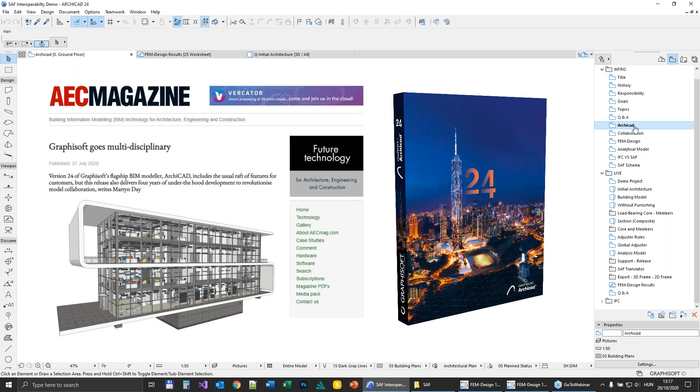For the design phase, when there is a lot of iteration work between the disciplines, Archicad 24 and BIM Cloud offer a common workplace for real-time collaboration among project team members. Architects, structural engineers, and MEP engineers can work together on one common model in real time, with protection for the different roles and responsibilities. When they set the construction elements and their function together, Archicad creates the analysis member representation

of the load-bearing elements under the control of the structural engineer team member. This analysis model becomes the parametric input for an analysis software to create its own native model without data losses or any conversion. As a side note, for the detailing phase, Graphisoft still promotes the so-called reference model concept in the name of the Open BIM approach. That means Archicad can federate IFC models stored on BIM Cloud within the project.

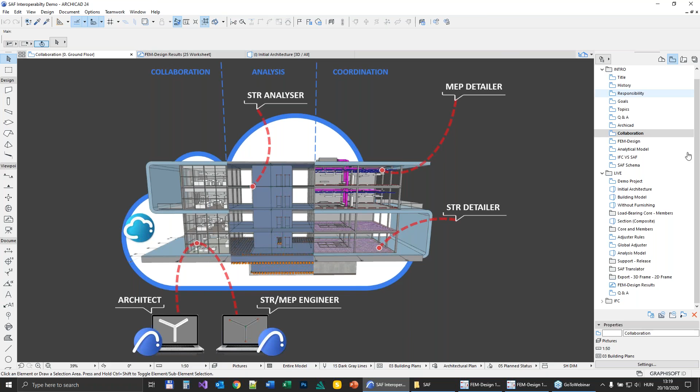If we go back to the analysis model part, there comes the opportunity to connect to Graphisoft's new ecosystem with FEM-Design as a structural model analyzer, as a steel, reinforced concrete, or timber designer. As mentioned before, the analysis model is the common language between the structural BIM modeler, Archicad, and the analysis software, FEM-Design.

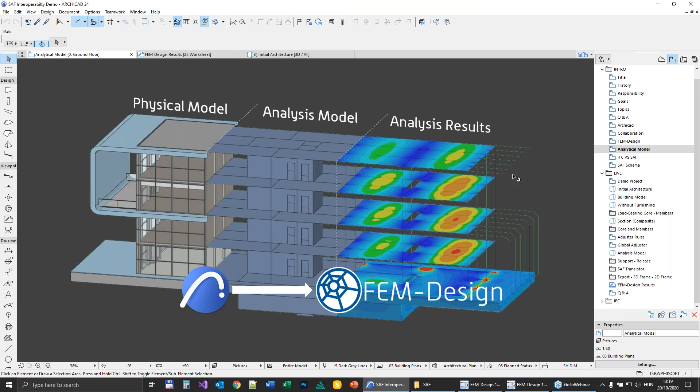There are 2 open source file formats that can be used for analysis model sharing: the so-called IFC special model view set, which we call structural analysis view, and an Excel-based new format called SAF, structural analysis format. Both are optimized for storing analysis model components, such as beam, column, wall, slab members, structural supports and connections, structural profiles, and materials.

But there are 2 major differences. Thanks to SAF's Excel format, engineers who especially love Excel immediately and easily understand the file content, easily check its correctness, and easily edit it within Excel if necessary. They can also create macros or functions to manipulate or use Excel data for other reasons, for custom calculations.

You may also read an IFC file, for example, in a text editor, but you should understand the hierarchy and the relation between the members, the file rows. You are not able to see the same type of items like materials, profiles, supports, nodes, and so on, listed together on one page. As opposed to that, in SAF, you can see the different item types in different worksheets.

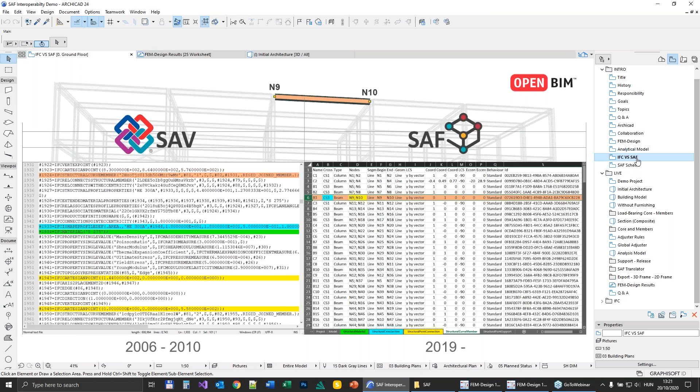As I said, the SAF schema is open. Its description is available on the following public site, you can find it here. And you can easily understand the meaning of the column headers or items of this file because you can see description, examples, and so on.

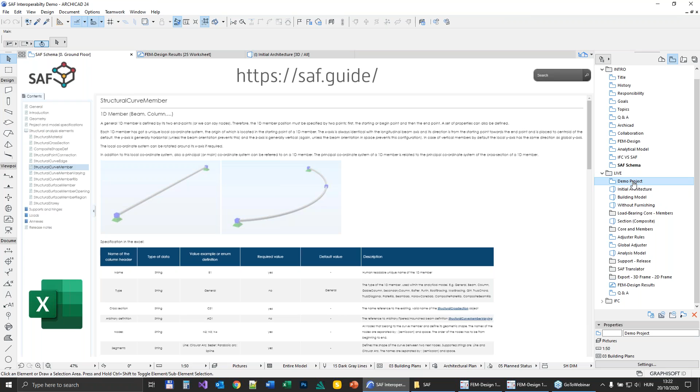Now let's start the live demo about the collaboration workflow between Archicad and FEM-Design. I will use a Graphisoft project for the demo. Let's see it live.

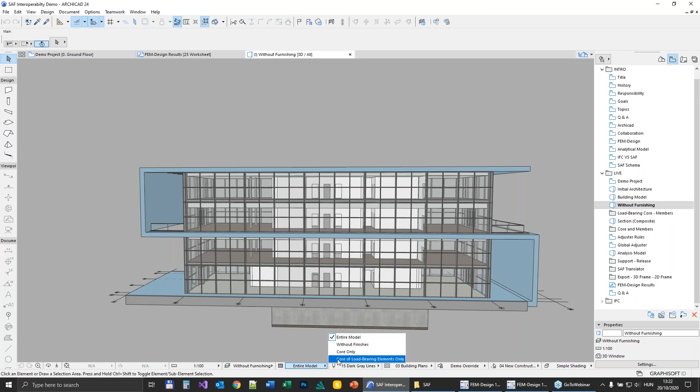Here you see the initial architecture. Thanks to the layer system or element classification, you can easily filter for the building model, and maybe show the building model or only the construction elements without furnishing. If you have classification for the load-bearing elements, you can easily filter for them with one click, using the partial structure display. We call it core of load-bearing elements only.

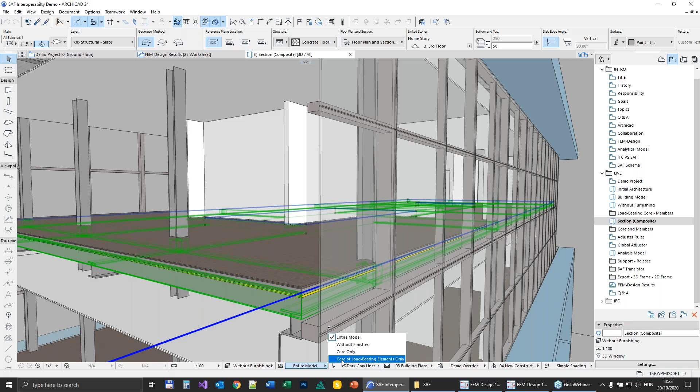I show you a section view of this model. Here you see that, for example, the slab has a composite structure. If I check the skins of the composite structure, there is one core skin of this composite called reinforced concrete structural. Here you see the core. If I show now with the partial structure display the core of load-bearing elements only, you can see only this core part. This is important for the analysis.

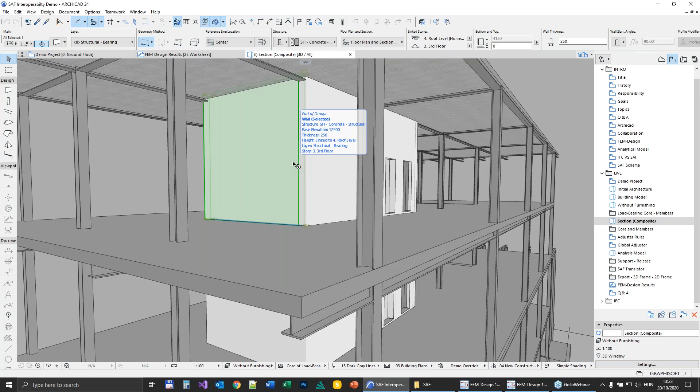In Archicad, the software creates the analytical model inside the core parts. It's the same for the walls because it's also a composite element. You can easily check its material. And if now with one click I show you the analysis model, you can see that the members are generated only in the core, by default in the center of gravity of the elements.

I can hide the physical body so you can see much better the analysis members. You can see here 2D members for slabs, walls, roof elements, and 1D members for columns, beams, trusses, and so on.

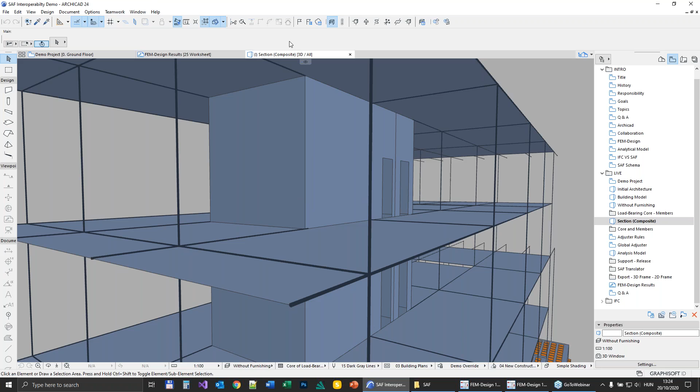Let's see how Archicad generates the analytical model. Here you see an example: there is a column and a beam connected to each other, and by default these elements are not adjusted. As mentioned before, the default position of the analytical members is in the center of gravity of the elements. The user can define rules, or Graphisoft also suggests adjustment tools in the package by default.

You can define how these elements should be connected. What is very important, and it's a must, is that the analytical model must be continuous, because one element transfers the load to another. It's important input for the analysis application that the finite element calculation should be run on a continuous model.

Here you see an example that the user creates an offset for the beam. This is the first rule. Then just stretch the column to the beam, and it's cut back the beam to the common intersection of the two elements.

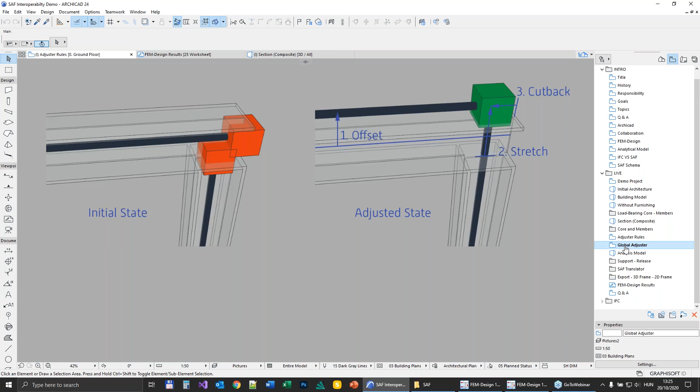You may ask why we need this offset. Because it's very important to consider the neighboring elements. Here you see a neighboring connection with major elements connected to each other. That is why we need to offset this beam element and then continue with the stretch, the cutback function.

So the user can create global and local rules, and based on this, they can fulfill the continuity requirement. I just show you the dialog. Here you can define the adjusters. For example, here are the global rules, which are valid for a tool, for example for a slab tool — so there is an offset adjustment for elements created by the slab tool. Or you can define local rules defined by criteria. For example, they can use classification to define different local adjustments, such as adjusting the footing classified elements to the slab elements. You can also set rules for how the software handles openings and so on.

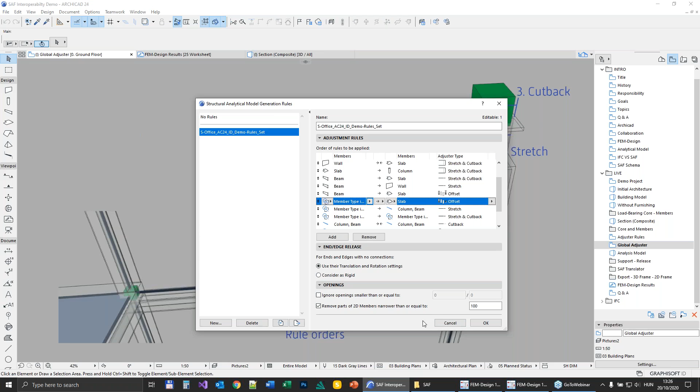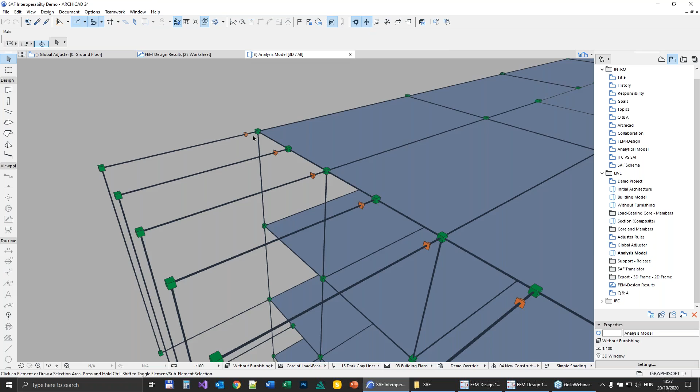Finally, here you see the analysis model I showed you before. As you saw, in Archicad you can also create supports to support the whole structure — here is a special command for this, the structural support tool. You can also define the end releases of the members. Here you see bar elements, and if I turn on the visualization of end releases, you see that for beams, one end has a fixed connection and another end has a so-called hinged connection, so all rotation components are allowed.

If we are ready with the analysis model, we can export this model to an analysis software. For this, you need to do so-called profile and material mapping. You should define this mapping optimized for the receiver application. Some analysis applications have their own mapping system, but I think it's much better to do it in a modeler.

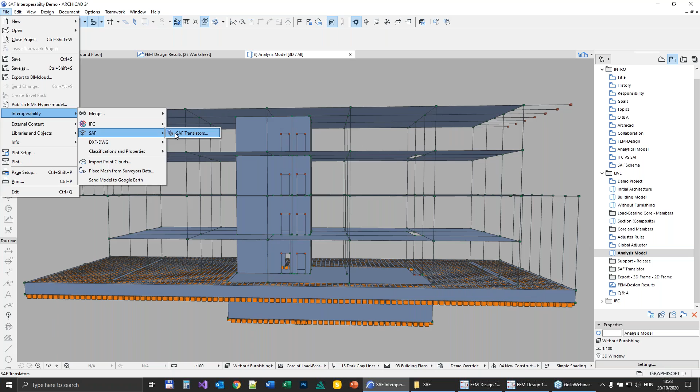For that purpose, Graphisoft implements so-called SAF translators, and here you can set settings for import and export. Here you see, for example, the material mapping. As you see, by default it's empty, or it can be defined by the default Archicad template. But now I would like to focus on this project and add some materials.

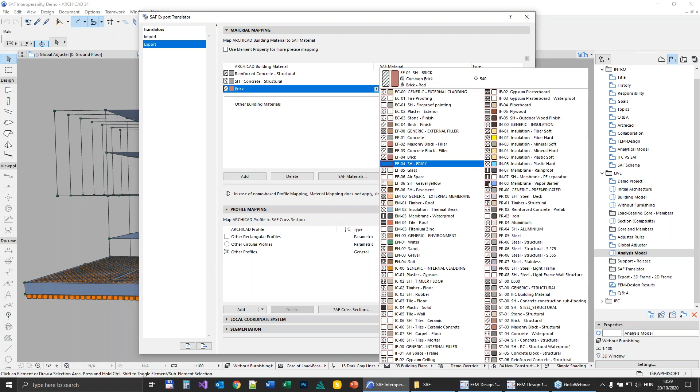For example, there was the slab part. It was reinforced concrete structural. There was another material for the walls, this concrete material. Also, there were steel elements, with this steel structural material and so on. Here you see that the list for the mapping is empty, or there is only one object.

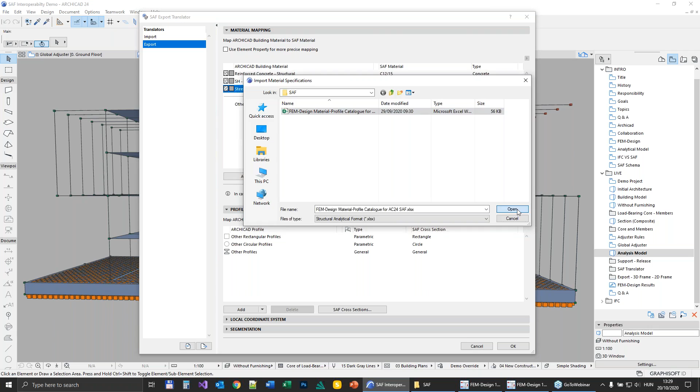Here you need the FEM-Design named materials. How can you get these materials? There is a so-called SAF material importer where you can import, for example, all materials defined by default in FEM-Design, or defined by a FEM-Design user. Just click open, and as you see, all concrete, steel, and timber materials are now available in FEM-Design naming.

So then, if I go to reinforced concrete, I can choose to set it for a FEM-Design material with this concrete quality. Then I choose another material for the other Archicad material. Of course, in Archicad, you can also create well-defined concrete and steel qualities, but in this project, the architect together with the structural engineer just defined general materials. And for steel, instead of concrete, I can choose this steel quality.

There is a so-called Jolly Joker material. That means that all other materials which are assigned to the analysis model but not mapped here will be mapped with the Jolly Joker material. For example, I use a very weak concrete for it because we need investigation of these materials.

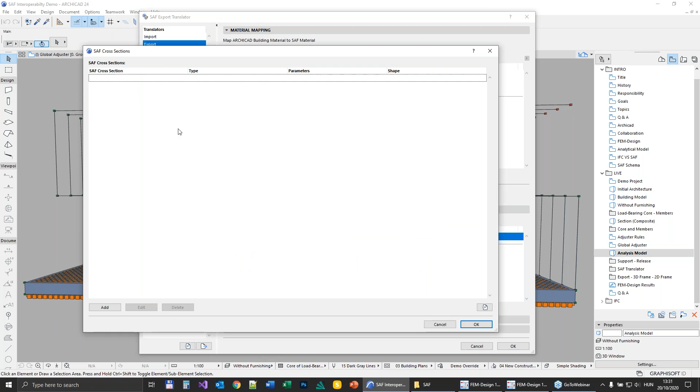Let's go to the profiles. With one click, I can import all profiles used in the project for the load-bearing elements. In this project, only one steel profile was used, and now I would like to map it. For that reason, I can import it first. Here you see that the SAF cross-section list is empty. So now I import all profiles available in FEM-Design, or in a FEM-Design project, from the catalog. And here you see thousands of profiles available now.

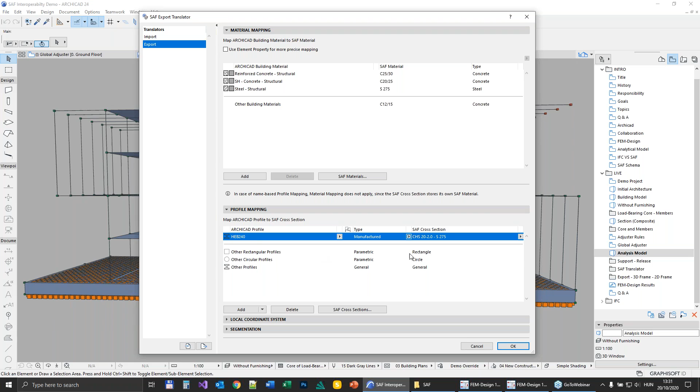Then I can go back, and here you see that I would like to use name mapping. That means that this steel profile should be mapped with the FEM-Design available profile. Then I search for this element, and here you see the same name, but in a different written formula. Okay, I'm ready with the material and profile mapping.

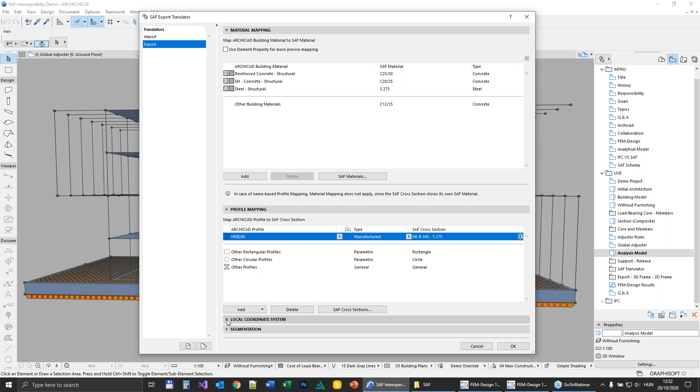There are some other mappings for the export. For example, by default, Archicad uses a special local coordinate system for positioning the cross-sections for 1D members, so for columns and beams. FEM-Design uses a so-called general local coordinate system. So here you should set the local coordinate system used by the receiver application. Now we use FEM-Design, so we use this setting.

And the last setting at the export is about the curved walls. You know that major structural analysis applications don't support curved walls. They use polygonal, so-called straight segments for the curved parts. It's true for FEM-Design also. So now I use the so-called segmentation settings, and then I am ready for the export.

If I collaborate with FEM-Design on further projects, then I can save this as a translator, and I can use it, or I can add it to an Archicad template and use these settings for all projects. Of course, you can define more detailed material mapping. Now I mapped only the used materials and cross-sections.

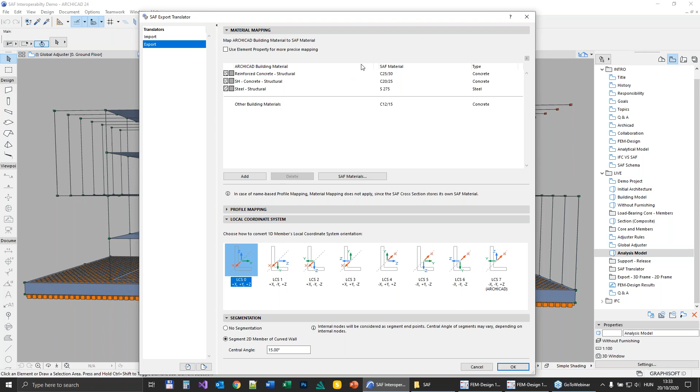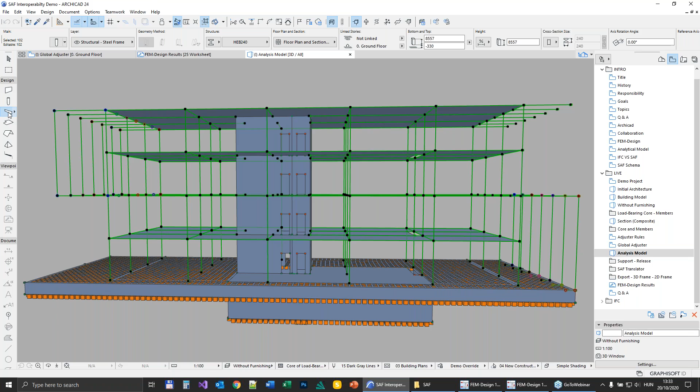Okay. Then when I'm ready, now I can start the export. I can export the whole analytical model, the entire analytical model, or I can export only some parts of it. So for example, only columns, or only beams, and nothing else. So here you see the frame structure. Or I can select one frame standing, and I can export it.

So if I go to export settings, so save as, here you see that there are three options. Selected elements means the elements I select in the model view, or the current model view. If I choose visible elements, I export all elements visible in the current view. If I choose entire project, I export the entire analytical model. Now I would like to export the entire analytical model, and I give it a name, for example, Archicad analytical model. Then save it.

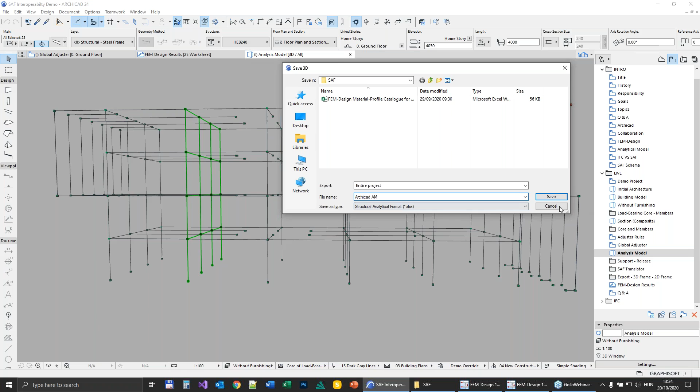As you see, it's very fast. Then I can check, it's not a must, but I can check the analytical model file, the Excel file here in Excel, or in Windows you can use this preview mode.

Here you see that there are different sheets in the Excel file. There is one page for the project info, another one for the model info, and here you see the local system we use and set for the export.

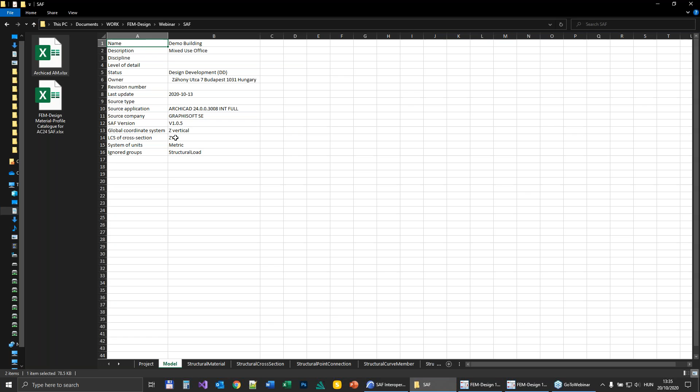Here you see the materials. As you remember, we map the three materials, one steel and two concrete.

Here you can see the one profile and use the FEM-Design naming because I use that for mapping. I really like this Excel format because if something is wrong with the mapping, if I make a mistake or I'm lazy and forget to do correct mapping, I can easily override the names here and so on.

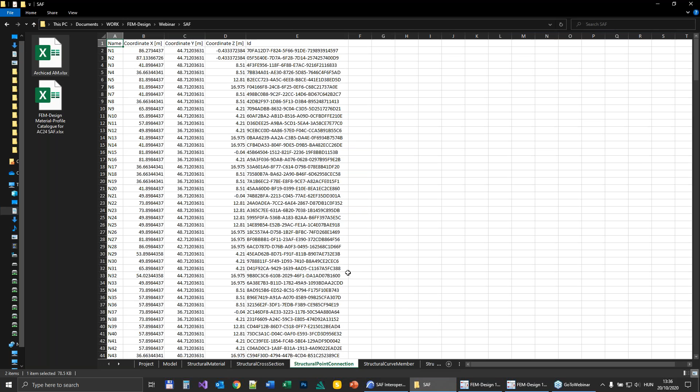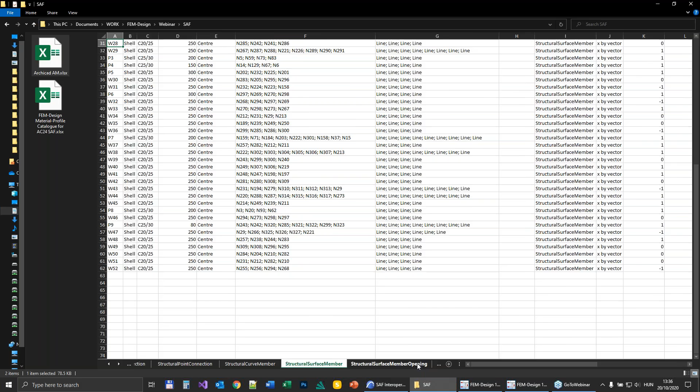Here you see the nodes, the endpoints or corner points of the members. Here you see the curve members represented with beams and columns and other elements. Here you see the surface elements represented by the slabs, walls, and roof elements in Archicad. Here you see the openings, for example, the door openings in the walls.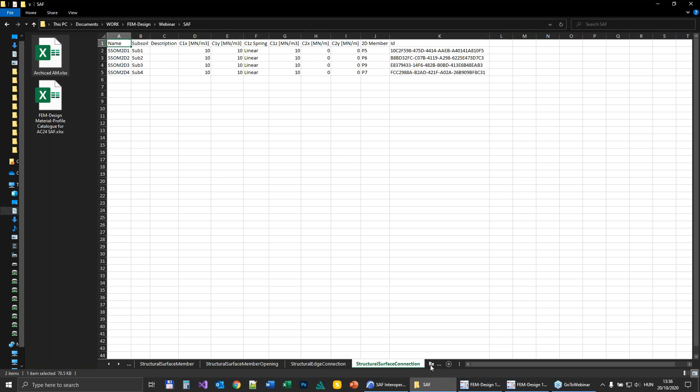And here you see the edge connection, so the linear support under the walls. Here you see the surface connection, so the surface support added to the footing slabs. And the last sheet here contains the end releases.

Remember, there were beams with different settings for the start and end ends. Here you can see the hinge connections, so the rotation components are free, they are allowed.

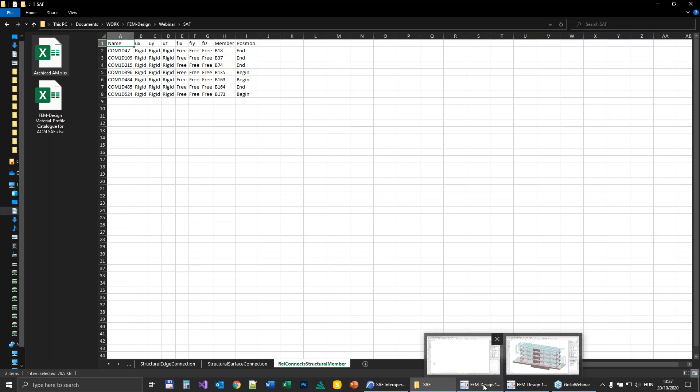Okay, now then I can go to FEM-Design. I just use the open command. I select the file format, SAF, and here you see the file I export it from Archicad, and with one click...

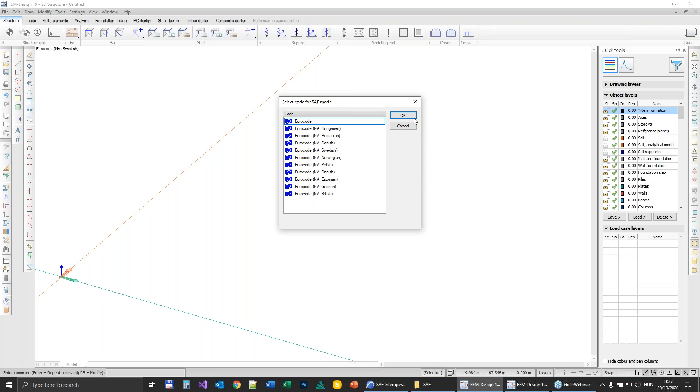A dialog welcomes me. I can choose a standard for the calculation and the design. I use the general Eurocode now, and voila! Within 2 seconds or less, here you see the analytical model defined in Archicad without any data losses.

So if I select, for example, here you see the beam, here you see the profile, and the material is correct. Here you see the slab, the material, and the thickness is correct. So it's the core thickness, not the whole slab thickness.

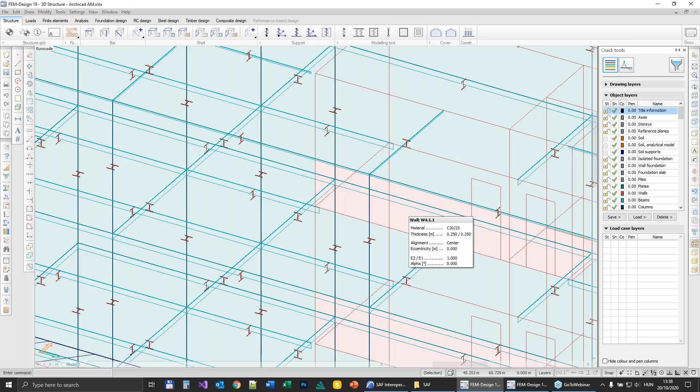As I mentioned before, it was a composite. Here you see a wall with the same material and thickness, and so on. Here you see the supports defined in Archicad.

And let's see the end releases. Here you see the hinge connection, and at the other point there is no symbol, that means it's a rigid end, and so on.

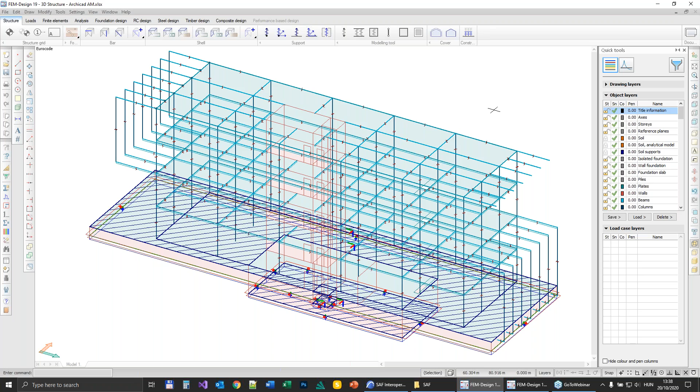So the model is here. I may run a calculation for this, but before I do this, I always check that the model is continuous or not. In Archicad, there are also checking tools to check the continuity of the model, overlaps, and so on.

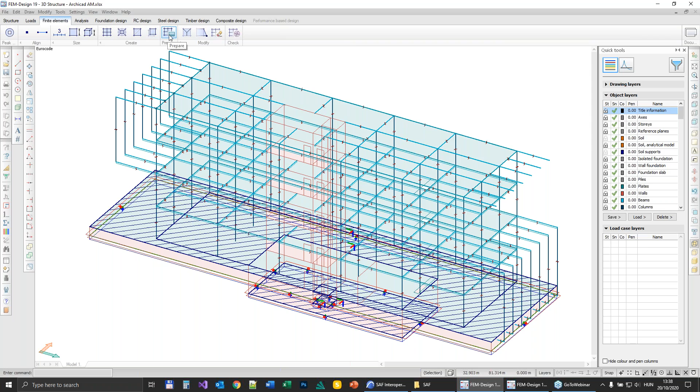But you can find these options here in FEM-Design also. I always run the finite element mesh generation to see that the elements are connected and there is no problem with it. And here you see it's very fast, and it sends us one warning.

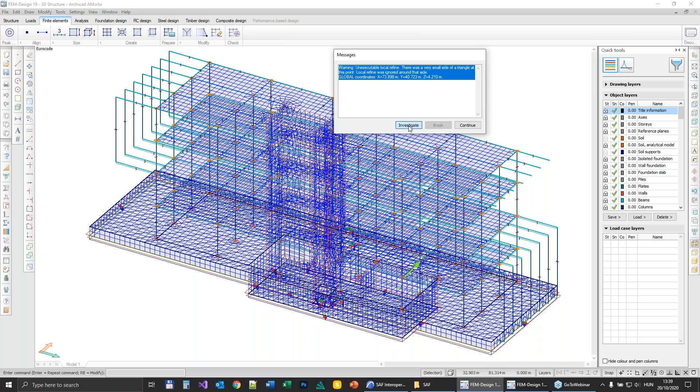It's just a warning, it's not an error, so there isn't a real problem, but a warning that there are too small finite elements. Now I investigate it, and if I zoom in, here you see very, very small parts with very, very small finite elements.

What can I do? I can solve it in Archicad, or here in FEM-Design I go back to structure, where we have this correct model function. I select all elements, and I can run checkings.

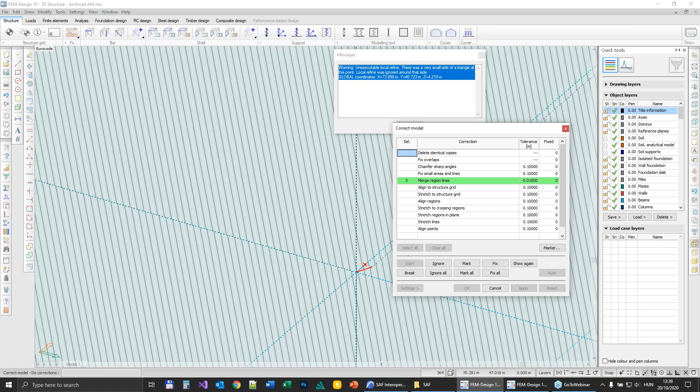For example, I start merge region lines because there are small regions here. Just start it, and here you see the program immediately finds this warning part. I fix all these issues, and if I apply it, you see that the program solves these very small regions.

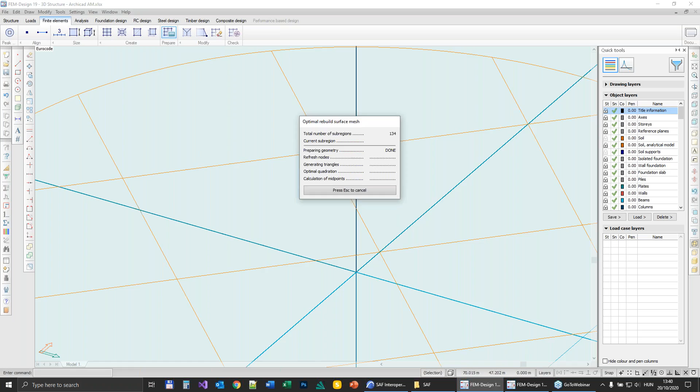Now I go back to finite element mesh and rerun the element generation, and if the program doesn't send us a warning, that means our model is correct. Here you see, I can show it in shade mode - a very nice finite element mesh on this structure.

Okay, now I would like to run a very fast analysis for this. For that purpose, I create one load. I call it dead load, so the self-weight of the structure, and I just say that this contains the dead load, press OK, and now I can go to analysis and run calculation for this load case.

It's very fast. Of course, you can run a calculation for only some parts of the building. For example, if you export only the frame structure or one standing, it's faster because of fewer elements, but I hope you can run a very fast calculation for this.

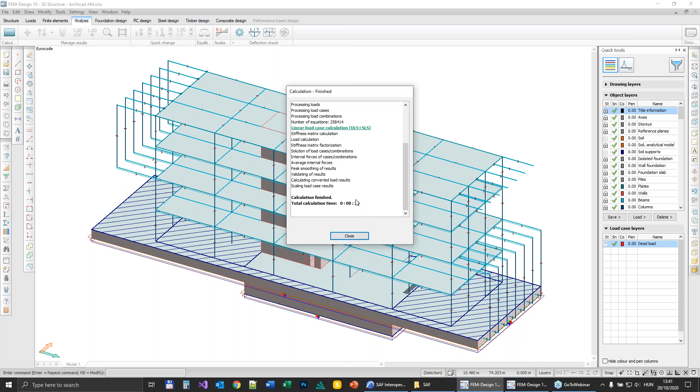Now we are close to the end. It calculates the internal forces, and within around half a minute we got a result. Remember there were only about 2 seconds to import the model, so within 1 minute from the import, you got an analysis result for the whole project. I think it's amazing, and now I can show results.

For example, I show you the displacement in color palette mode, but of course you can show the deformed shape together with it.

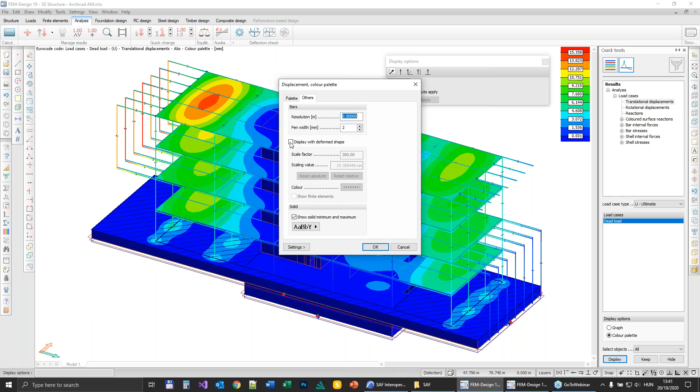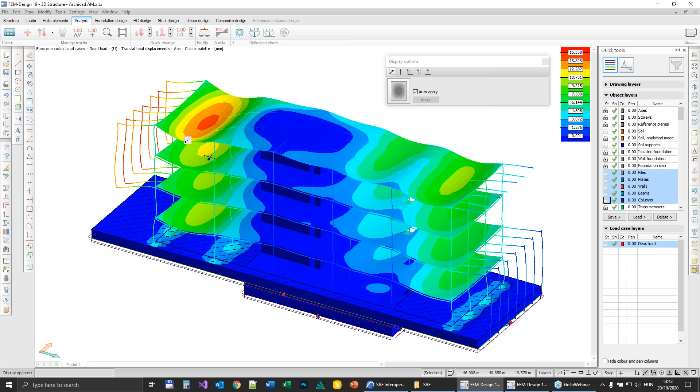Here you are. If you don't like the original position of the elements, FEM-Design has a layer system similar to Archicad, so I can hide the elements and just focus on the results. And here you see, I can run an animation to see much better how the whole structure deformed for the dead load.

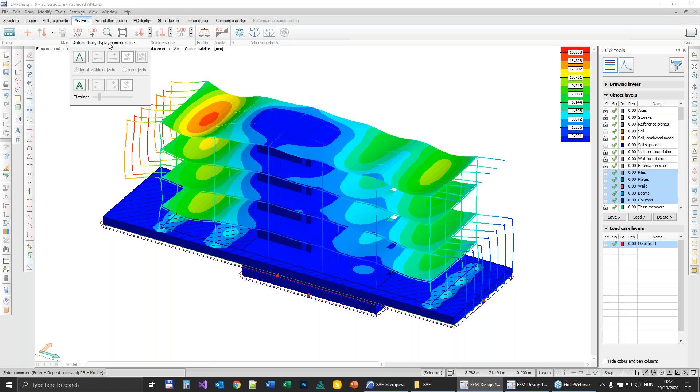If I stop this animation, I can also show you maximum values. For example, I would like to search for the maximum displacement. With one click, I can do that. And here you see that 15 millimeters is the maximum displacement for this whole structure for the dead load.

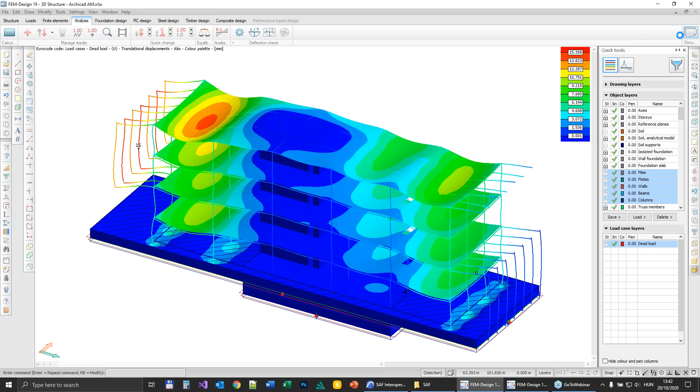When I'm ready with the analysis, I can go to documentation, and I can create a template for the documentation. I already did it for this demo, and the program automatically generates results within about 10 seconds. Here you see, and then you can go through the pages.

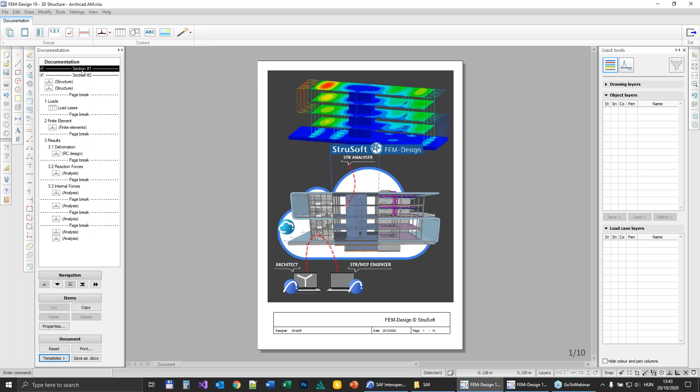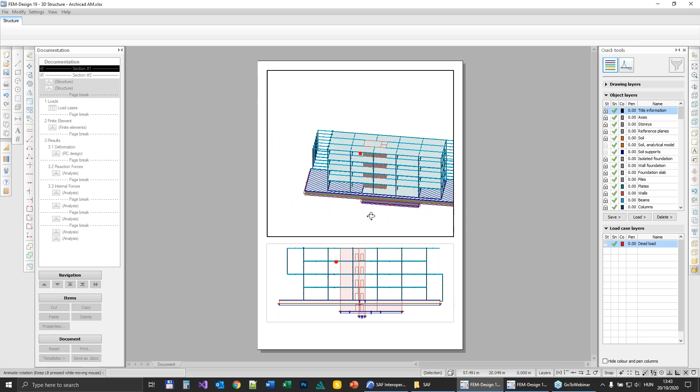Here you see that there is a cover page, then you can see an image about the structure. If you don't like the display settings of one image, I really like that they are live images, so I can click on it, zoom in, do shading for the elements, and rotate the model if I don't like the image. When I click outside, this will be fixed for the documentation.

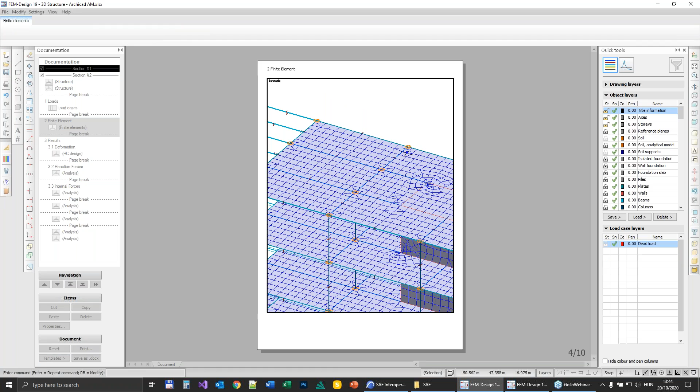Then I can show you here, there is only one load, the dead load. There is a finite element. It's much better to show it in shaded mode, or you can zoom in on a part of it, as mentioned before. Here is the deformation. You can also use this shading mode.

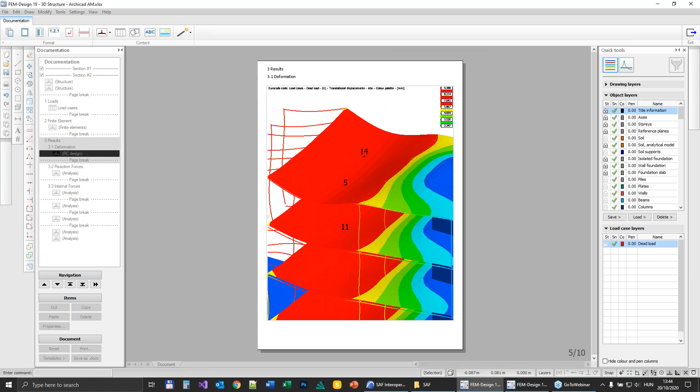You can add values by clicking on the image if you like, so here you see the displacement and the reaction forces. Maybe it's much better to rotate the document here because of the size of the image, and so on.

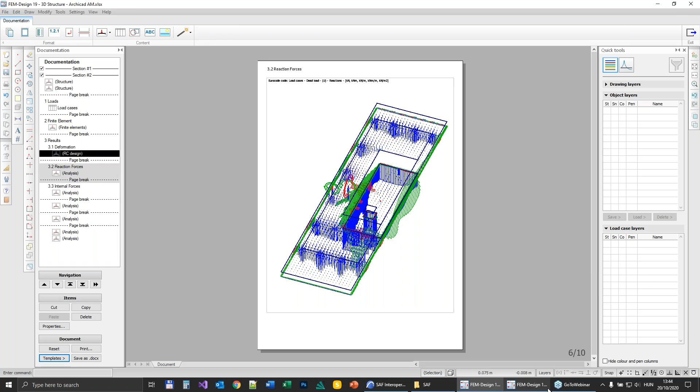And with an extra click, you can save it as a PDF or as a Word document. One of my colleagues created a whole analysis for this sample project.

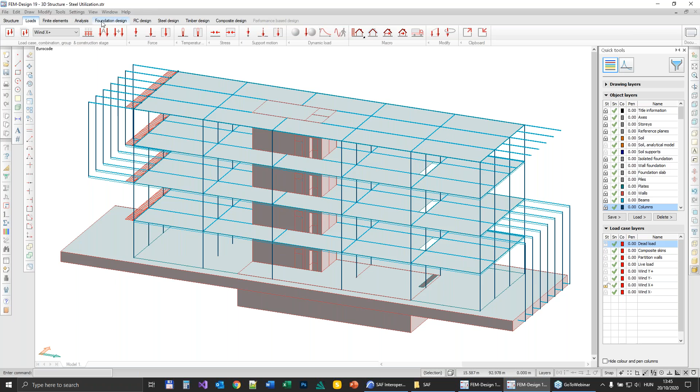He defined more loads. Here you see the dead load, the live load, the wind load, and so on. He also created load combinations, the load combinations required by Eurocode, and then ran calculation analysis, for example steel design.

And here you see that I can check the utilization of the steel elements. Here you see that there are problems with some columns and beams; they are more than 100% utilization. That's not good, so in that case you can modify the size of the element.

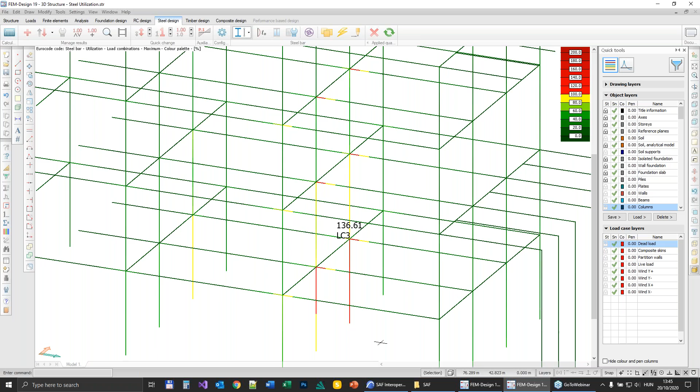For example, the profile, or give it a stronger material. You can send this analysis result back to Archicad, for example in PDF, and you can place the FEM-Design PDF inside Archicad as a document, and you can see that it's really nice quality of the elements.

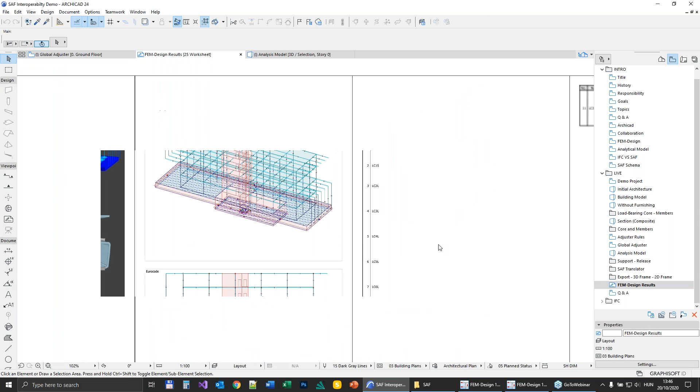So you can easily check. Here you see the loads defined by my colleague and the results with the maximum displacement.